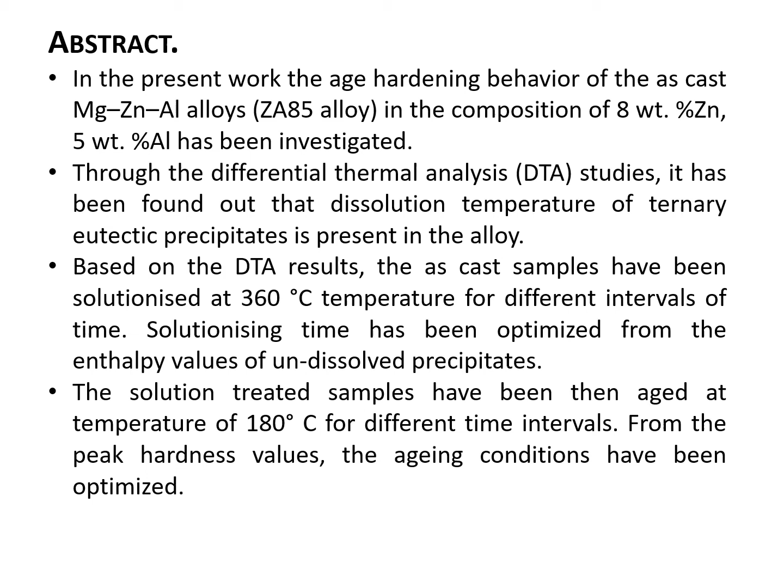Introduction. The Mg alloy is a promising material for the fabrication of automotive, aerospace and electronics components. So far, most Mg alloys have been used in automotive components like steering wheels, disc wheels, gearbox, chain locker, instrument panels, seat frames and crankcase where the operating temperature

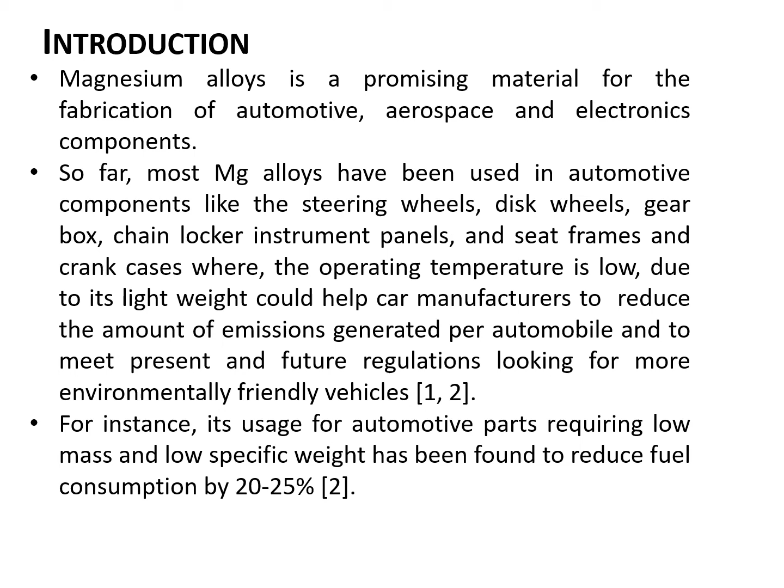is low. Due to its light weight, it could help car manufacturers reduce the amount of emissions generated per automobile and meet present and future regulations for environment friendly vehicles. For instance, its usage for automotive parts requiring low mass and low specific weight has been found to reduce fuel consumption by 20 to 25 percent.

However, the low strength of Mg alloys compared to aluminum and steel has limited its use in many areas. In order to improve the hardness of magnesium alloys, solid solution, grain size and dislocation density strengthening, which depend on the compositions and thermal treatment processes, had been widely studied, but the precipitation strengthening mechanism has the highest strengthening effect. So the present work investigated the age hardening behavior of the as-cast Mg–Zn–Al alloys using DTA studies and other conventional methods.

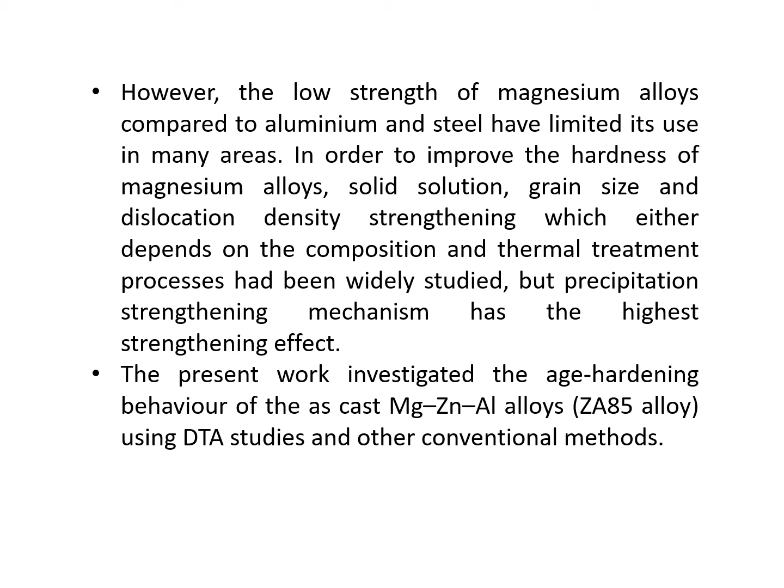The materials and experimental methods used for the current research work. Alloy preparation. The figure shows the image of one of the Mg alloy casting samples. Here in experiments, the permanent mold casting method was used. The second method, that is thermal analysis.

The DTA measurements were carried out on as-cast samples of Mg ZA85 to find out the dissolution temperature of the eutectic ternary phase using a differential thermal analyzer under argon atmosphere with a heating rate of 10 degrees centigrade per minute. From the DTA results, the solutionizing temperature was identified as 360 degrees centigrade.

The next method is heat treatment. The cylindrical samples were machined out from the casting of ZA85. These samples were heat treated in a furnace under CO2 atmosphere for the different schedules as listed below.

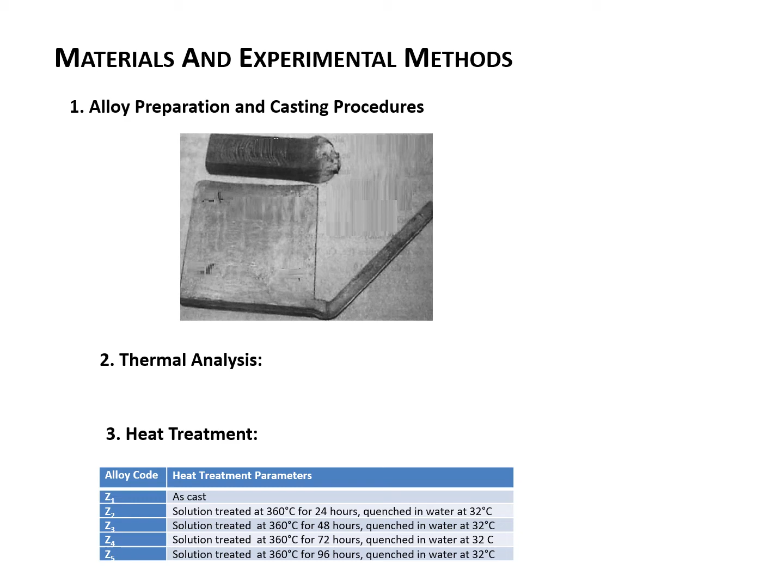Hardness testing. A hardness machine was used for the measurement of Brinell hardness number of as-cast and heat treated samples. For hardness measurement, one side of the specimen was polished with emery paper in order to remove the oxides and other scales.

Next method is microstructures. The SEM was used for microstructure analysis of magnesium, zinc and aluminum ternary intermetallics. And the last method used was X-ray diffraction, that is XRD. XRD was applied to analyze the phases present in the heat treated samples using X-ray diffractometers.

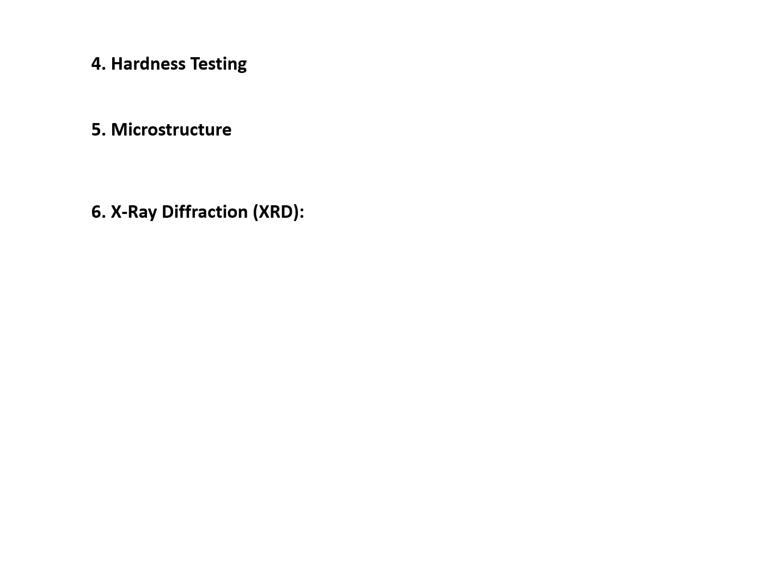Results and discussions. The first result and discussion includes microstructural analysis. The SEM micrograph of the permanent mold as-cast ZA85 alloy is presented in figure 2A. From this figure, it is observed that the microstructure of Mg alloy ZA85 contains alpha Mg matrix, ternary intermetallic phases and gamma stable phase at the grain boundaries.

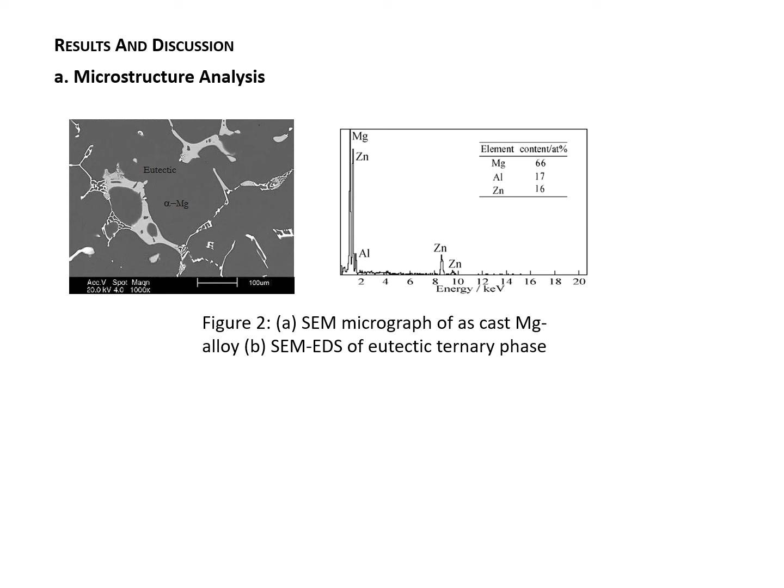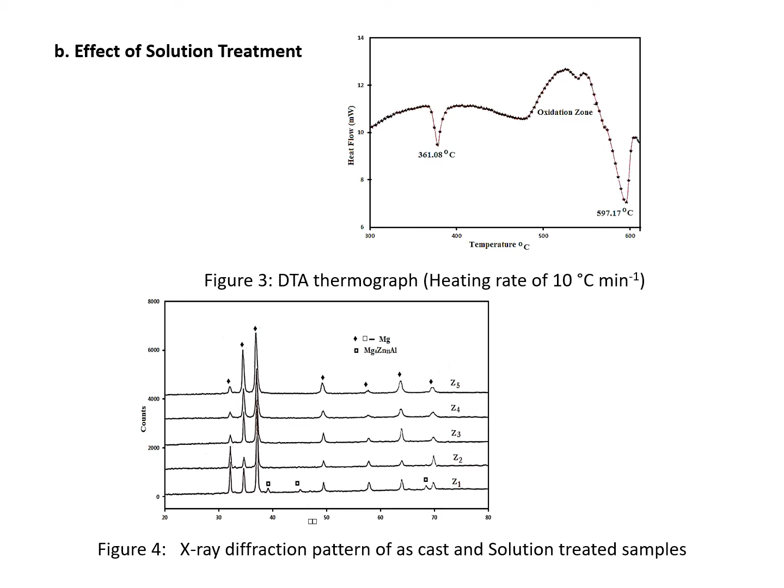This figure shows the optical micrographs of ZA85 alloy with respect to different solutionizing time. It is noticed from this figure that there is a significant change in the microstructure with increasing solutionizing time. Even though the microstructure of Z2 condition reveals the complete dissolution of gamma phase to supersaturated solid solutions, the presence of Mg matrix with some eutectic ternary phase can be seen.

The microstructure of Z3 and Z5 condition alloy presented in figure 5 B and C shows the presence of a considerable volume fraction of precipitates which are distributed along the grain boundaries even after increasing the solutionizing time.

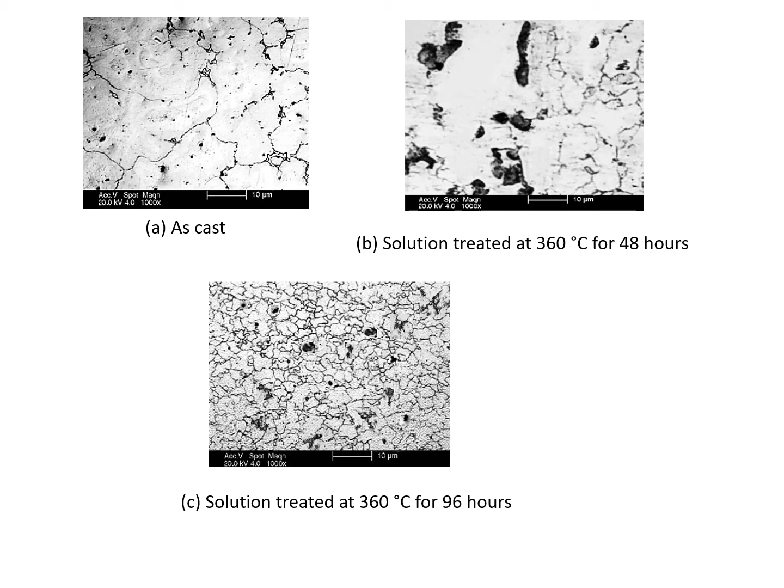The DTA studies carried out on the as-cast and ST samples at 360 degrees centigrade for varying time intervals, that is 24, 48, 72 and 96 hours, are presented in figure number 6. The peak temperature for eutectic dissolutions and enthalpy calculated from the DTA thermographs for all the samples are presented in table number 3. It is observed from the DTA results that the enthalpy decreases with increasing the solutionized time due to dissolution of the precipitates into the matrix.

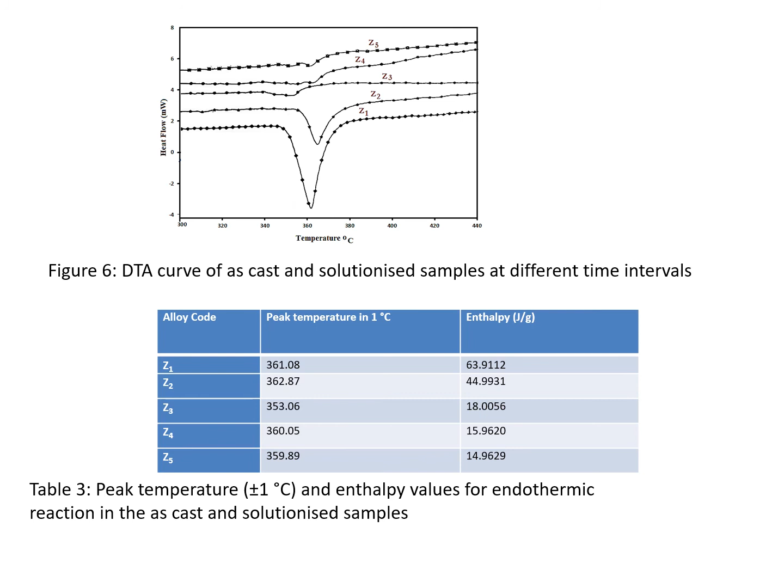The Brinell hardness values of the solution treated samples also show a similar trend as presented in figure number 7. It is evident from the hardness result that the minimum time required for dissolution of maximum ternary eutectic phase in the solution treated condition is 48 hours at a temperature of 360 degrees centigrade.

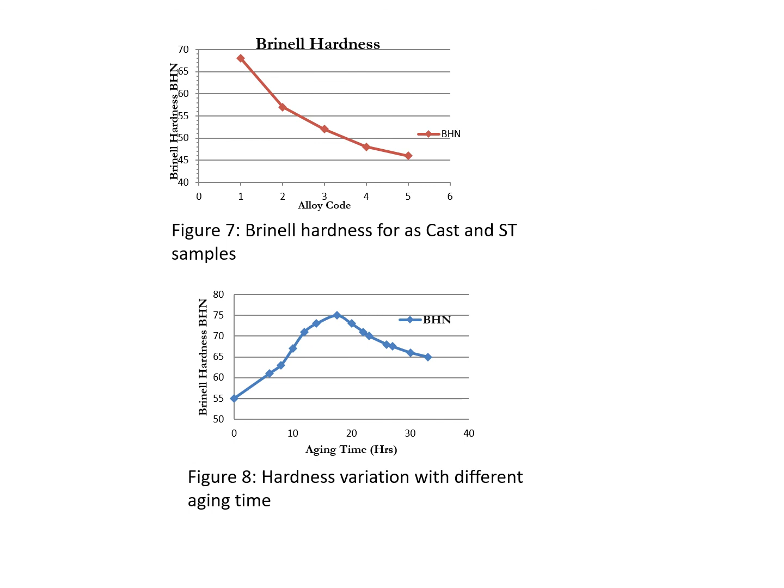Then, effect of aging. The hardness values as a function of aging time at 180 degrees centigrade are presented in figure number 8. It is observed from this figure that the hardness increases with increasing the aging time and maximum hardness is found at 17 hours of aging time. Beyond that, it decreases. Figure 9 shows the presence of fine eutectic ternary phases distributed uniformly along the grain boundaries, which act as an effective obstacle to dislocation motion, thereby improving the properties of ZA85 alloy.

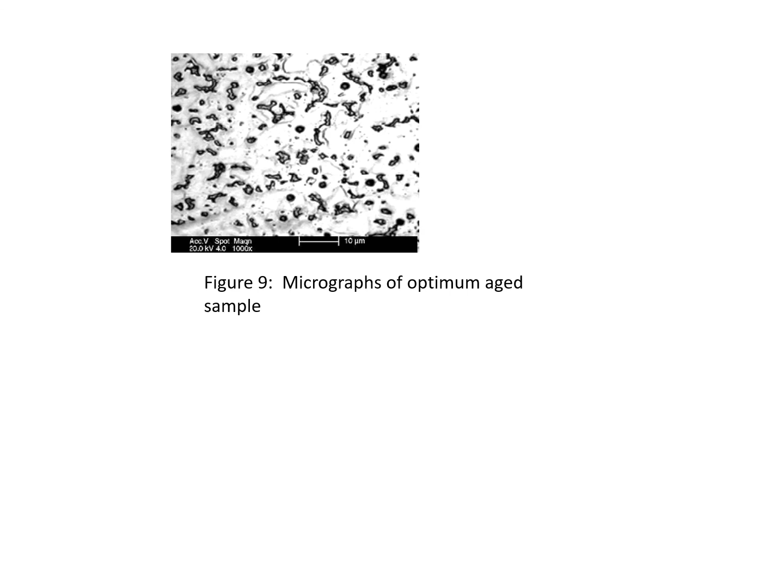Conclusion. In this research work, experimentation was conducted to investigate the age hardening heat treatment behavior of the cast Mg alloy ZA85. The following conclusions are drawn. A. The liquidus temperature of Mg alloy ZA85 is 597.17 degrees centigrade, whereas the dissolution temperature of ternary eutectic precipitate is 360 degrees centigrade.

B. To achieve the maximum strength properties in Mg alloy ZA85, the following heat treatment process needs to be followed: solution treatment at 360 plus minus 5 degrees centigrade for 48 hours, water quenching at 32 degrees centigrade, and aging at 180 plus minus 2 degrees centigrade for 17 hours. The hardness value increases with increasing the aging time and maximum hardness is attained at 17 hours of aging. Beyond that, its value decreases. This maximum hardness attained is associated with the optimum temperature and time.